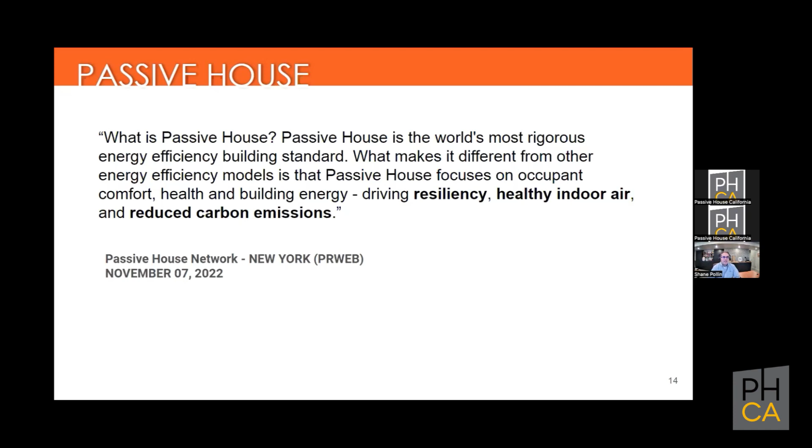We generally regard it as the world's most rigorous energy efficiency building standard. And what makes it different from other energy efficiency models is that Passive House focuses on occupant comfort, health, and building energy, driving resiliency, healthy indoor air, and reduced carbon emissions. Okay, so we generally know what it is. And for those of you who first became interested in Passive House on this call, I suspect you went online and did some research to understand what is Passive House.

And if you do that survey of readily available information on Passive House, what would we find? You'll see some themes. So we're going to do a quick survey. The three most important things about Passive Houses are comfort, comfort, and comfort, right? I'm just going to pull some excerpts out of these articles - various times, some very new, some only within a few years, but you'll see some themes emerge: no drafts off the glass, no cold spots, fresh air, right? Less overheating, sips energy, low income apartments that set a high standard for energy efficiency, right?

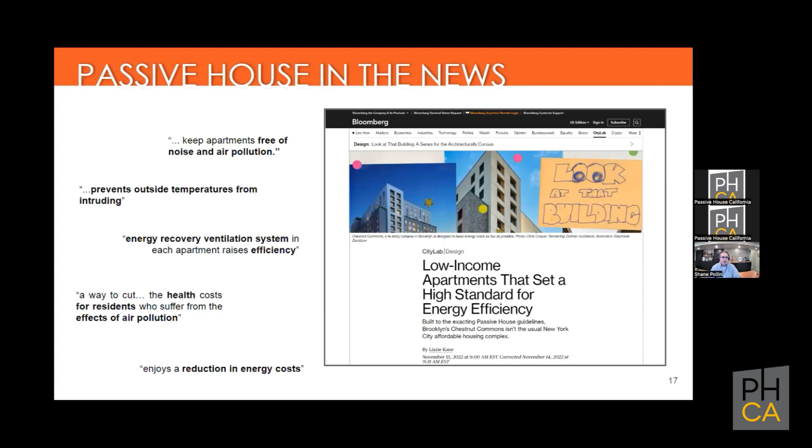Free from noise and air pollution. So not just efficiency, but here we're talking about noise and air pollution, prevents outside temperatures from intruding, energy recovery ventilation system, efficiency, health, a way to cut the health costs for residents who suffer, reduction in energy costs, right? It's a sanctuary, the magic of quiet, low-cost, allergy-free passive housing. Minimal energy, airtight insulation, keep in the heat, clean, fresh, and filtered air, no more smells. Again, clean air, lower electric bills. Comfort would be for everyone. Super insulated apartments, you may never pay a heating bill, tightly sealed, improved air quality, lower utility bills, better air quality, exceptional heat retention. I think we're seeing some themes.

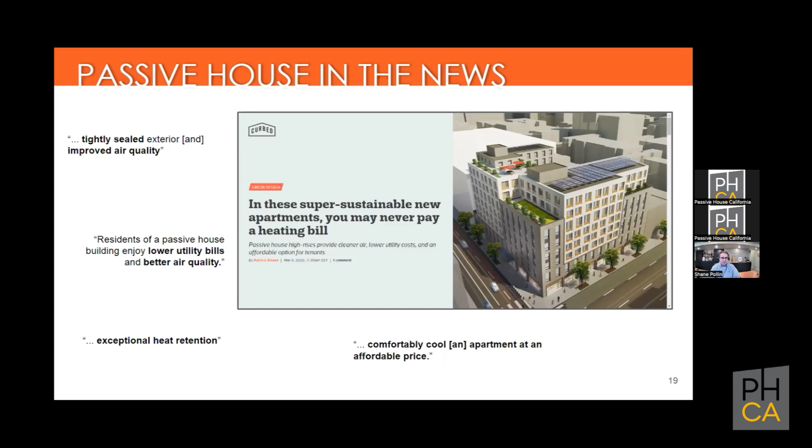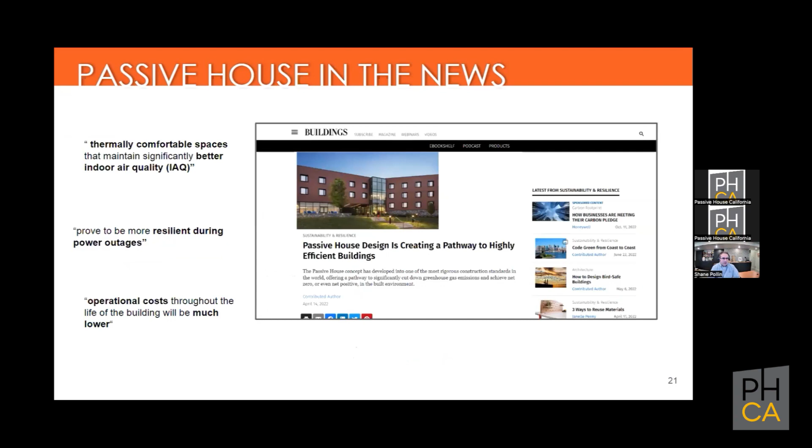Comfortably cool an apartment at an affordable price. How do passive house buildings stay comfortable in summer? Comfortable all year round, much more resilient, right? During periods of hot weather, reduce the heat transfer from outside to inside, helping the building to maintain cooler indoor temperatures. Passive house design is creating a pathway to highly efficient buildings, again, more efficiency. So again, comfort, indoor air quality, resiliency, operating costs, right? Net zero passive houses are the answer to housing energy efficiency, longer lifespan, starting to touch on some other themes, exceptionally quiet spaces. Again, noise mentioned multiple times. Safety and security, even when the power is out, bright, draft-free, consistently warm spaces.

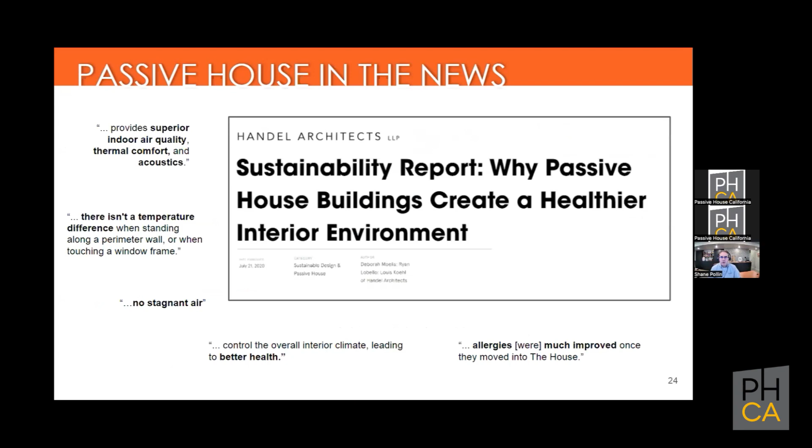Designing for a post-COVID world. So we're getting into some health themes, mitigating the spread of disease, fresh filtered air, again, efficiency, fresh air. Passive house certification should be seen as a powerful tool in your toolbox for providing a healthier, more comfortable, and safer building in our post-COVID world. You get the theme here: superior indoor air quality. There isn't a temperature difference, no stagnant air. This is not all talking about one building - these are various buildings all built to this standard that are all showing some of these same descriptions.

So it's clear that homes built to the passive house standard evidence certain characteristics. Here they are: they're quieter, no drafts, fewer pests, fewer odors, no cold spots, lower utility bills, use less energy, controlled humidity, less indoor pollution, lower maintenance, more fresh filtered air, lower operating costs, more stable indoor temperatures, more persistent temperatures during power outages. So we have, I think it's a list of 14 characteristics here that are characteristics of homes built to the passive house standard. And I'd say that these characteristics embody certain desirable qualities.

We hear a lot about these qualities lately, and here we've heard some descriptions of buildings, but these qualities to me are comfort, right? Healthy, durable, resilient, efficient. Let's go through them.

Comfortable: a lack of nuisance, pain, or unpleasantness in a space, a building that makes occupants feel content and secure.

What were some of the passive house building characteristics? Here are the characteristics I believe meet the definition of comfort, or help a building achieve comfort, namely quieter, no drafts, fewer pests. These are all elements we've heard repeatedly about a variety of buildings built to this standard.

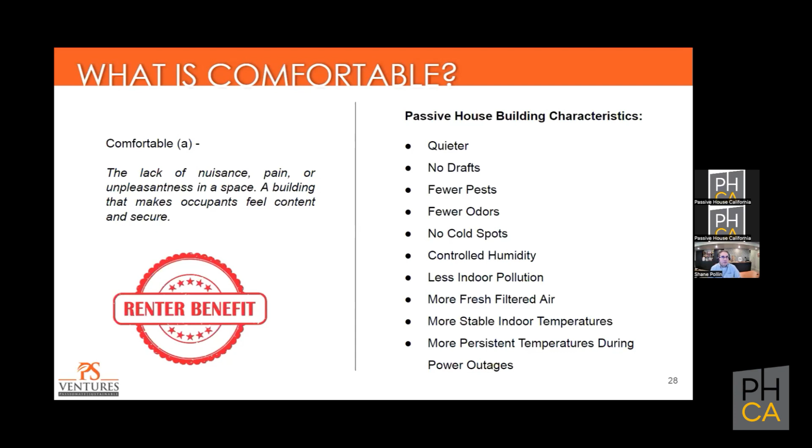I think we need to start focusing on some of these elements, because some of these comfort elements, if you've got high humidity, you can have things like mold growing, unwanted smells, uncomfortable temperatures, pests, outdoor pollutants coming in, and noise. How many times did those articles reference noise?

There's a new one, and you guys in California might be more familiar with this, but some things are new. For example, here in Maryland, there's adoption of legalization to some degree of marijuana. But that doesn't mean you want to smell it all the time in your apartment.

Scent is the sense most associated with memory. Many of you on the phone, myself included probably, have some memory, if you lived in multifamily housing, of what your neighbor was cooking or what they burned or what happened. I think we need to start focusing on and valuing these qualities in our buildings. Passive houses largely focus on sealing between the inside and the outside, but we can also focus on compartmentalization between homes.

Healthy: a building that provides for and enhances its occupants' physical, mental, or emotional state, conducive to or associated with good health or reduced risk of disease.

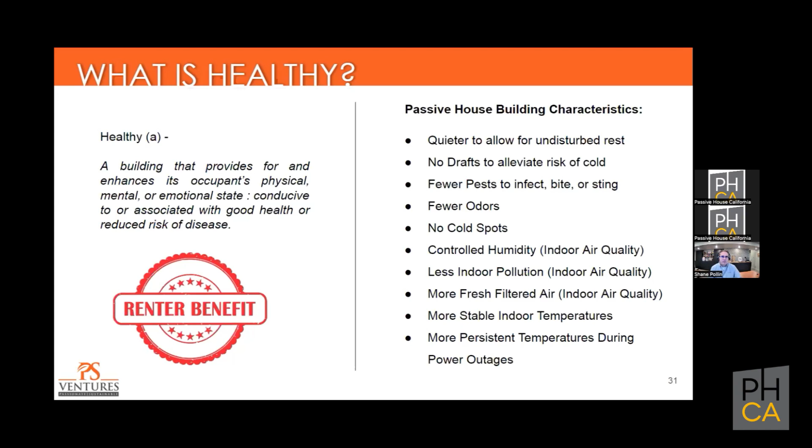Here are some of those passive house building characteristics. You'll note many of them are the same as we heard previously for comfort. In the interest of time, I won't read through them, but again, focusing on indoor air quality, the EPA says that the levels of pollutants in indoor air are sometimes 2 to 5 times higher than in outdoor air. So we're seeing an importance from an indoor health and air quality perspective of filtering out contaminants, having constant, low, filtered air. That's another element of passive house.

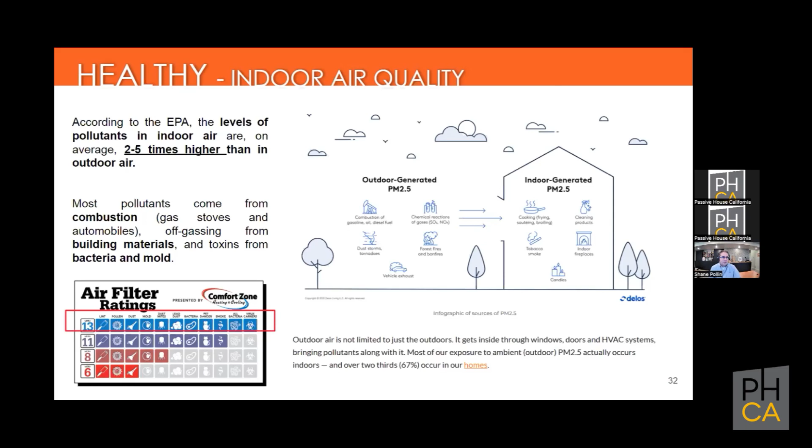I added this to the presentation because I'm respectful of the climate our friends in California are in, and I've spoken to friends who have experienced some of the smoke associated with the fires largely on the West Coast. You can see folks starting to put it together: Passive House is even good at keeping outdoor smoke out, through that same constant filtration. Create a clean room to protect indoor air quality during a wildfire. Wouldn't it be great if the clean room was your whole house, not just a room?

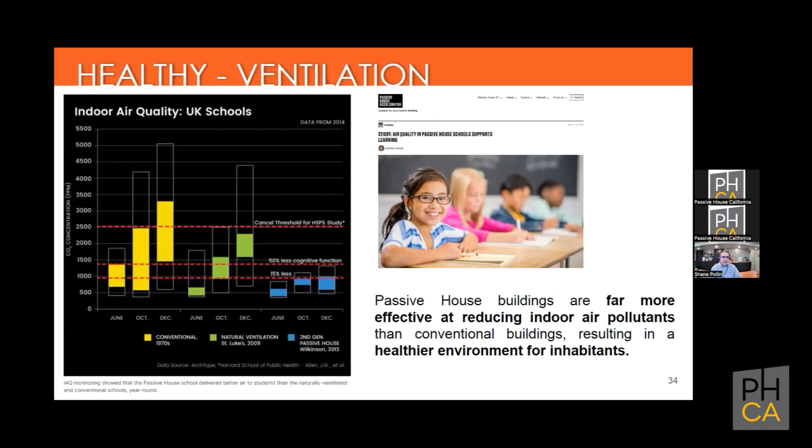Here we see some studies. Again, this information is readily available on the effects of indoor pollutants on occupants. This is from a study of schools, and the takeaway is that the air in a passive house building has far fewer contaminants than other construction types, probably because of that constant filtered air.

Durability is the ability of a building to maintain, over its lifetime, the performance for which it was designed. We'd argue that a lot of passive house is about attention to details, and that attention to detail is largely what helps keep passive house buildings more durable over the long term, especially controlling humidity to reduce risk of condensation. Lower maintenance costs also preserve continued performance with minimal investment. If it's really expensive to maintain, that could affect durability if owners can't afford to maintain it.

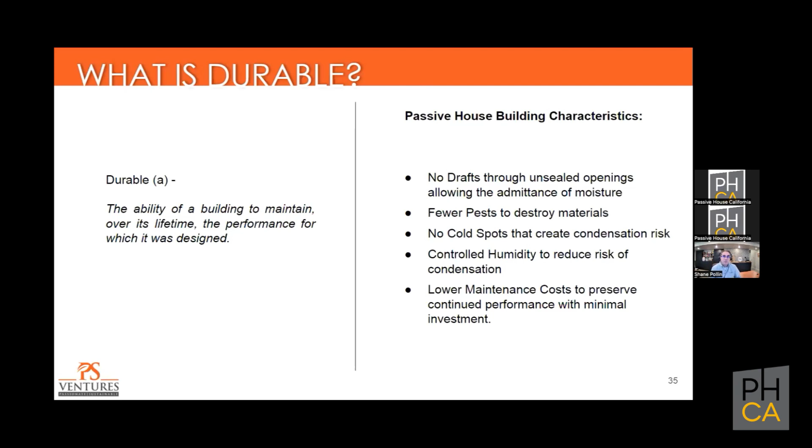Resiliency, right? This one's coming up a lot, and you'll see I've tried to focus on how almost all of these have a renter benefit. It's the ability of a building to resist and bounce back from adverse scenarios such as power outages, extreme temperatures, and damaging weather. In Maryland, fortunately, we don't have the same incidence of power outages that I understand are being experienced in California, so I know resiliency is a particular focus there right now.

I want to focus on this idea that there's resisting and there's bouncing back - there are actually two concepts buried in there. Maintaining stable indoor air temperature and resistance to outdoor temperatures is one concept, and then more persistent indoor temperatures during power outages to maintain livability and reduce time to return to normal is another. If you didn't lose all your heat or gain heat very quickly, you'll more quickly be able to return to normal.

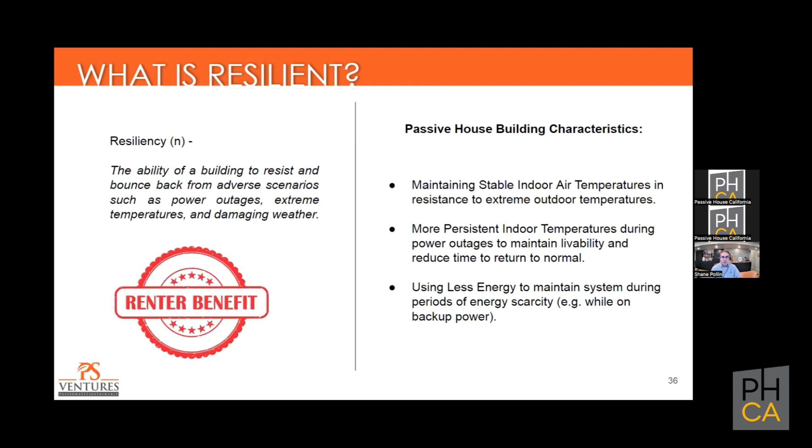Using less energy to maintain systems during periods of energy scarcity. If we have a limited amount of energy available, wouldn't it be nice if we could go farther with the energy that we have?

Whatever the cause, and I think there's a consensus on what is causing some of the extreme weather, weather has become unpredictable and extreme. These are two screenshots of unseasonably cold weather in Texas in 2021. A lot of folks became uncomfortable, homes became uninhabitable, folks were injured, and several people died in both of these instances.

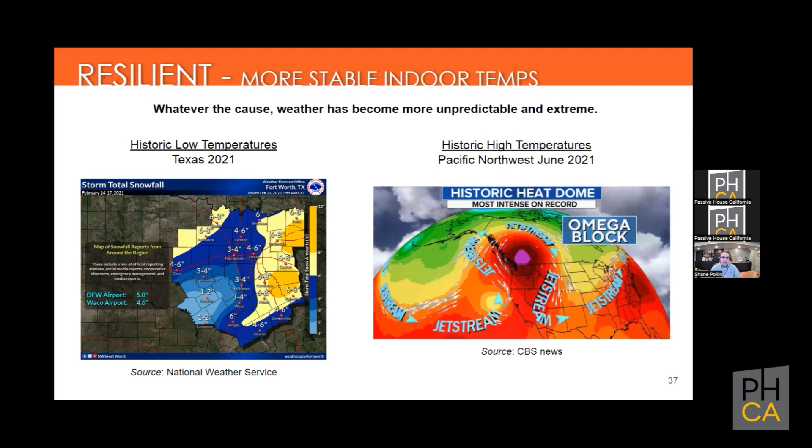Then historic high temperatures in the Pacific Northwest in June of 2021. You can see just a bloom of heat. Again, a lot of the properties in the Pacific Northwest don't have cooling, they're not used to these temperatures. Those homes became incredibly uncomfortable, unsafe, and again, in those heat waves, some people died.

So what do we know about passive house? A study conducted in 2020 compared the simulated thermal performance of various buildings during a winter blackout in Duluth, Minnesota. The bottom line is that homes with passive house standard building envelopes and net zero energy buildings maintained safer indoor temperatures for significantly longer than even code compliant new buildings, lasting over 6 days before indoor temperatures fell below 40 degrees.

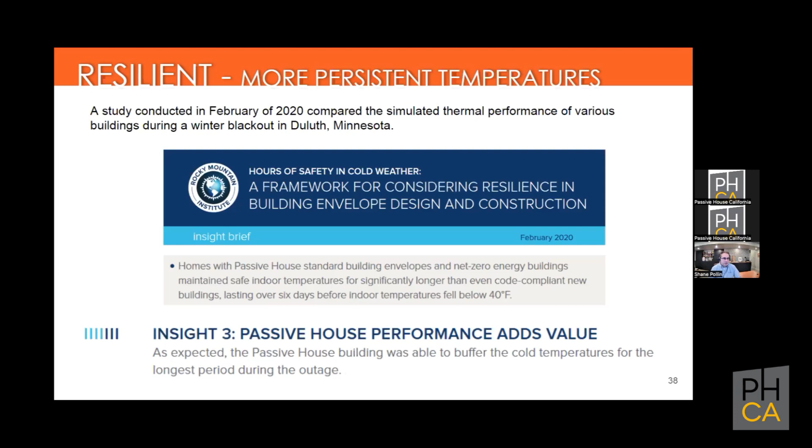As expected, passive house buildings were able to buffer the cold temperatures for the longest during the outage. Getting into that a little bit, what they found is a 90% reduction of severe hours. They categorized the hours based on comfort levels, here less than 40 degrees, and you can see in this slide how much longer it took the passive house building to get cold. In other words, it retained its ability to be comfortable for a lot longer.

So here the passive house building took 152 hours to fall below 40 degrees, as opposed to even just a net zero home at 61 hours. Again, you can put solar on a net zero home, but that doesn't mean it's necessarily going to achieve the benefits we're describing of a passive house. That's an important thing to understand.

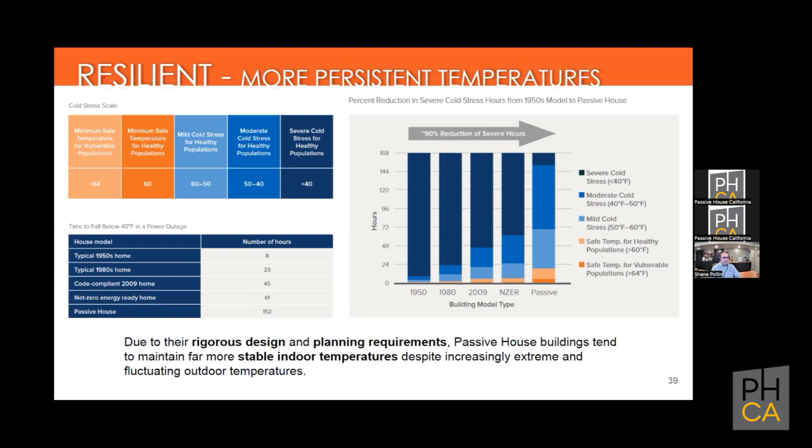And here we see it in graph form, as the passive house persists in its temperature and resists that reduction, that change in temperature, because of its robust envelope.

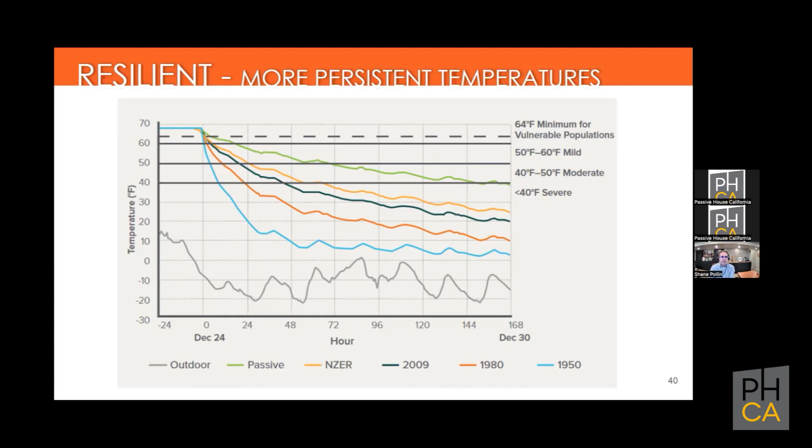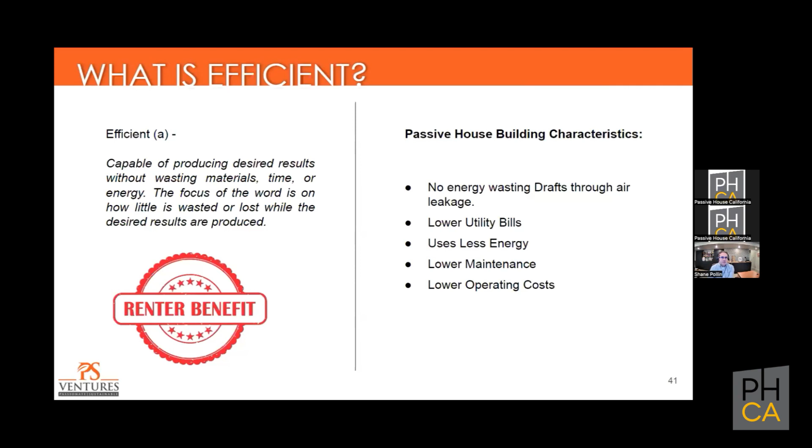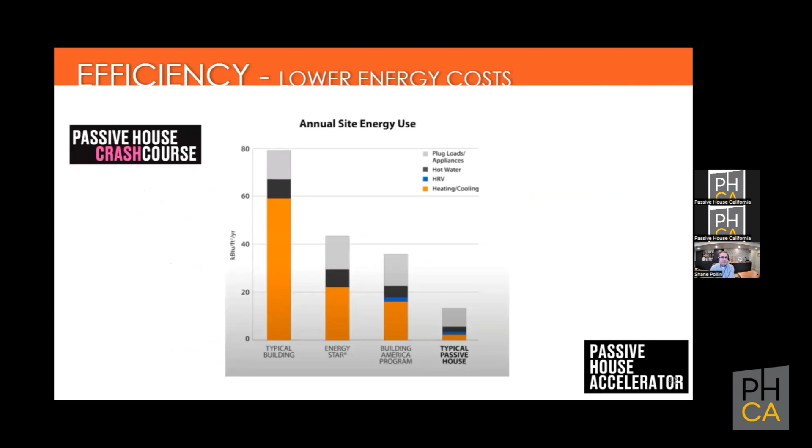Efficiency: capable of producing the desired results without wasting materials, time, or energy. The focus of the word is on how little is wasted or lost while the desired results are produced. Again, certain passive house building characteristics evidence efficiency. I think everybody knows what we're really after in terms of efficiency is a pretty significant reduction in consumption by a passive house building.

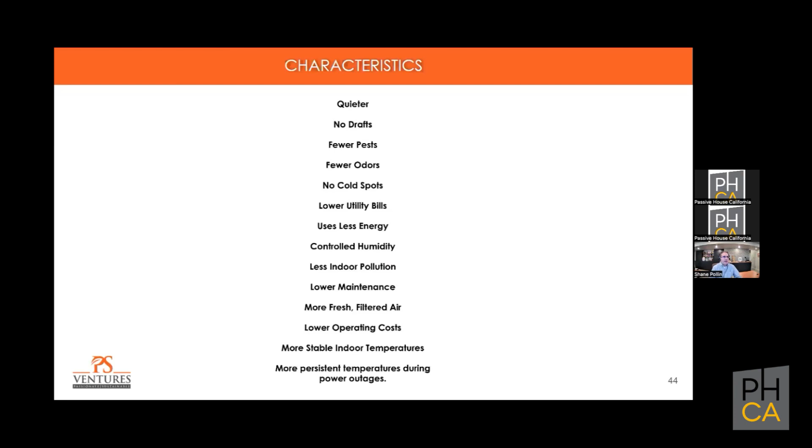So passive house characteristics and synergies. Here are those 14 characteristics we discussed earlier. Here are the ones that contribute to making the building comfortable, and here those that contribute to making the building durable, resilient, healthy, and efficient. We had such a hard time with this, and shout out to PSV team member Will Combs, who's on this call, who helped us visualize this overlap. It's not easy to simply categorize some of the elements of passive house because they're interrelated, and I think this helps show it all together.

So here are the characteristics. These 14 characteristics lead to these 5 great, highly desirable qualities. So if all we need to do is achieve these 14 things to achieve all those great qualities, how do you achieve these things? How do you get these? And that is passive house.

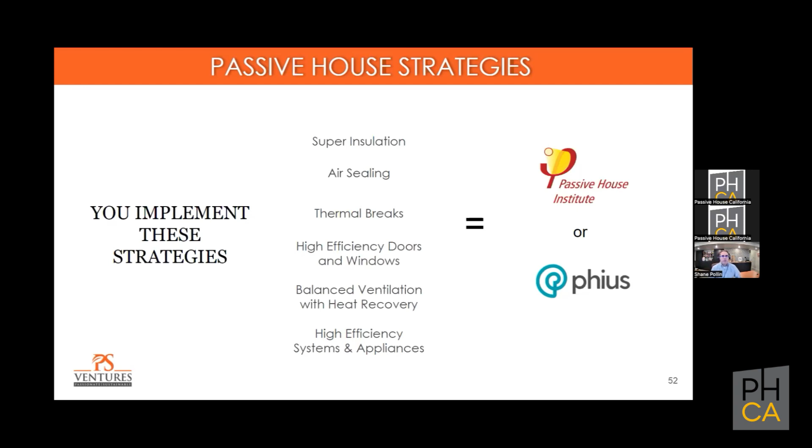The principles of passive house: super insulation, air sealing, thermal breaks, high efficiency doors and windows, balanced ventilation with heat recovery, high efficiency systems and appliances. Unfortunately, we still have this messy two passive house systems, but either is based on the same science and both are focused on these elements.

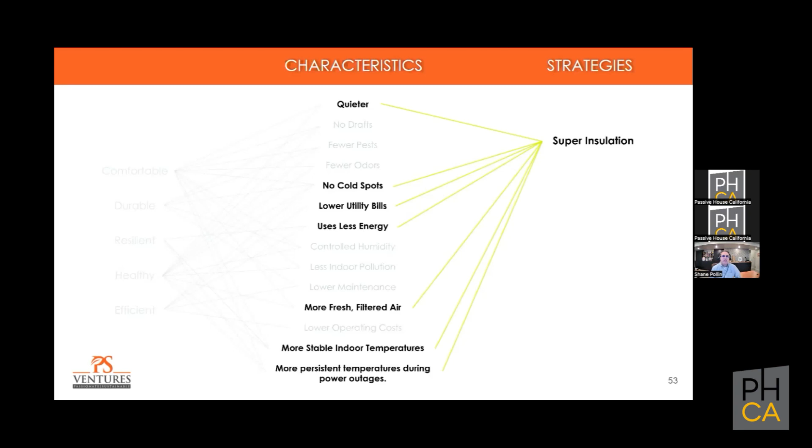So let's go through those. We said superior or super insulation, right? That's what makes it quieter, reduces the cold spots, lowers the utility bills. Here you can see how the passive house elements flow back to create the characteristics. Air sealing is the most important, in my opinion, and as is reflected here, it impacts every one of the characteristics in one way or another.

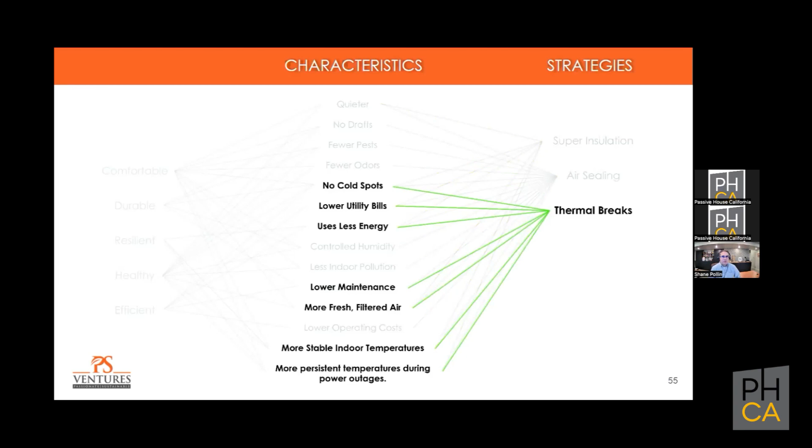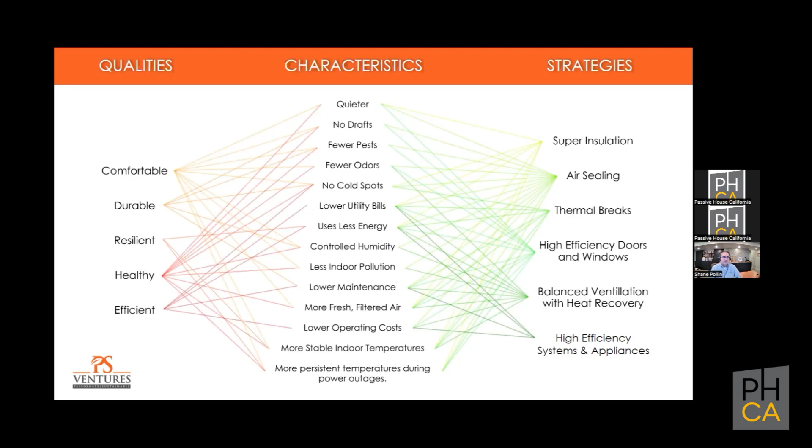Thermal breaks, or reducing or eliminating thermal bridges, high efficiency doors and windows, and balanced ventilation with heat recovery. Here we have high efficiency systems and appliances to lower the utility bills, lower maintenance, lower operating costs. And here we put it all together to see how these characteristics, created by these passive house strategies, lead ultimately to these highly desirable qualities.

So if passive house is so great, with all these fantastic characteristics leading to great qualities, why don't we see more passive houses around here? I think the answer is you will.

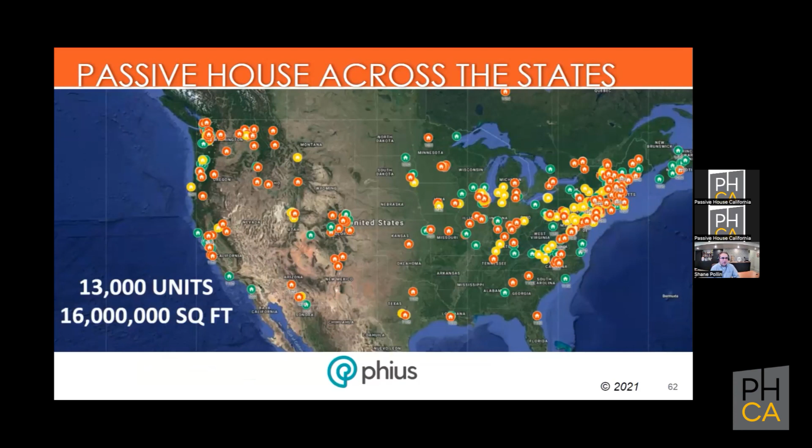I think this is a good place to mention that some of the reason you can see high growth like this is that passive house means not just houses, as everybody on this call probably knows, but you can bring the standard and these methodologies across a variety of product types. I've experienced many of them. So again, more evidence it's not just houses, and largely I think where passive house can do a lot of good is in the multifamily sector. We just finished discussing why it's really beneficial to renters and ultimately will be beneficial to owners.

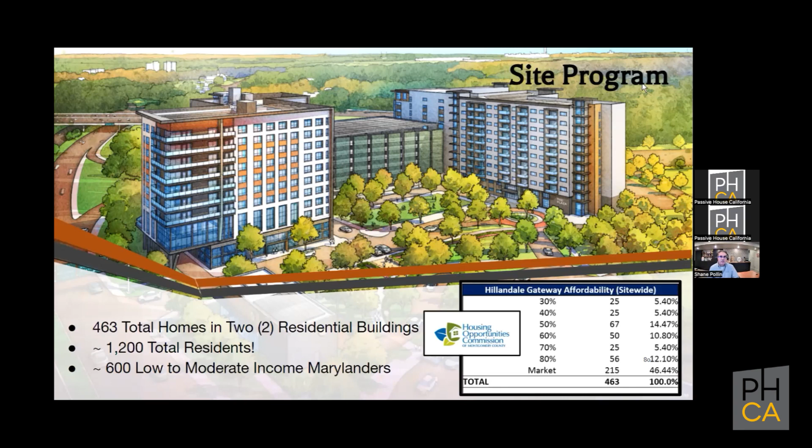However, we don't have just one rooftop. We have the rooftop of that building, we have 2 vertical faces of a parking deck, the roof of a parking deck, and a neighboring roof. And we're going to have the entire community solar devoted to that one building, which is a senior, age-restricted building. In that way, the entire property is really supporting the energy needs of that one building.

At Hillandale, we're thinking about sustainability in a multi-tiered manner. We have foundational at the bottom. These are built in, not something we're bolting onto the building. Most of the passive house elements, the super insulation, the air seal, these are not things that are going to change later. They're baked into the fabric of the building.

Then above that, we have an active backup layer, provided by our backup generators. It's to afford the ability for the office, the leasing staff, to continue to operate in the event of a power outage. We've got some emergency circuits. We're actually going to be seeking an innovative strategy where, while we don't have enough energy to power all units off of our backup generators, we do plan to install a single USB outlet in each unit so that if the power goes out, what do most folks want to do? Maintain connected and charge their phones. We do that also to limit the amount of energy drawn off of that system, by putting it only on a USB charger, but allowing critical systems like telephones, pads, medical devices, small devices that can charge via USB to maintain charge.

And then at the highest level, we will be incorporating a resiliency hub, a dedicated space. This is something being incentivized by our local utility company. We will have the ability to have refrigeration and freezing, for things like mother's milk and medications. While resiliency hubs aren't often required in our jurisdiction to provide controlled temperatures, because we're building to passive house standard, controlling the temperature is relatively easy and is not a high load. So we will be providing controlled temperature. We'll probably provide emergency food, water and light. And we are investigating making that resiliency hub a microgrid.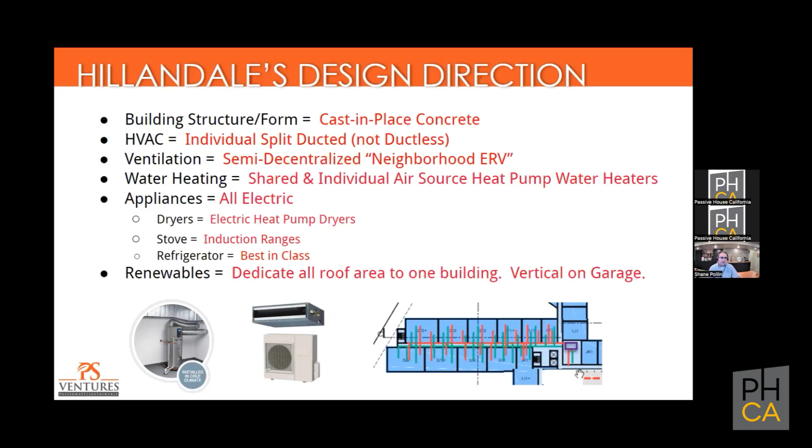Again, all electric heat pump dryers, induction ranges, best-in-class refrigerators, and again, to dedicate all that roof area to one building and vertical on the garage.

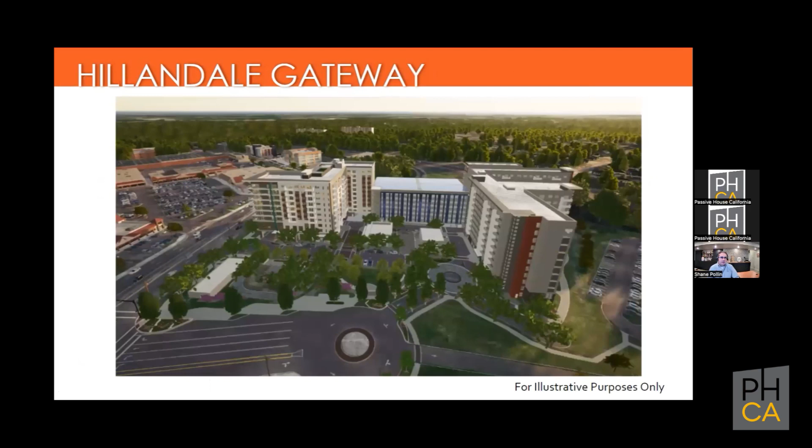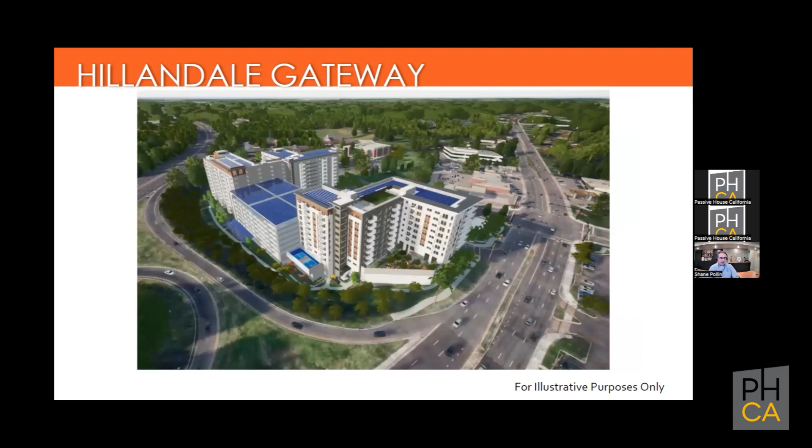And so here we're going to see some other views of Hillandale as we sort of orbit around. That highway in the background is Interstate 495, also known as the Capitol Beltway around Washington, D.C. To the left in this image, you see the Hillendale Shopping Center, and this was again an asset owned, continued to be owned, by members of the Duffie family—so again, very invested in the community. Here we orbit around, and you see the solar on the roof.

Our partner is the Housing Opportunities Commission, and commendably, we do not design the affordable homes any differently than market rate homes. The affordable units are spread throughout each of the buildings, with a higher concentration only within the 155 homes because it represents a replacement of a property that was here previously. But we don't concentrate affordable housing into one area, and we don't change the specification level between market rate and affordable.

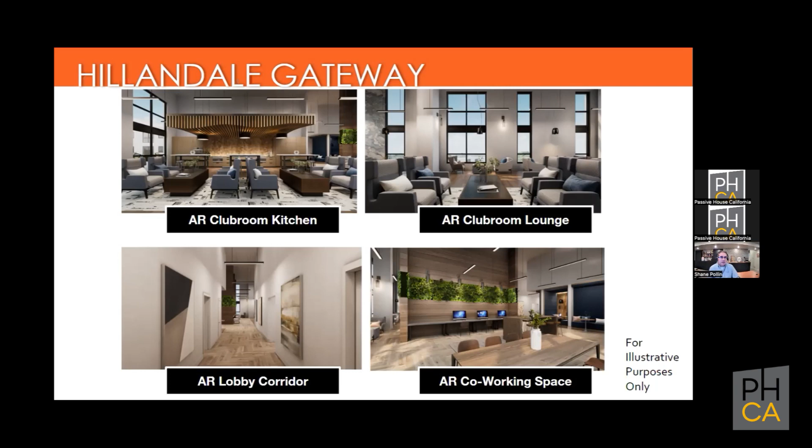So here we see some renderings, and I'll end on this slide. The most common question I usually get, particularly in the development community, is how much more does all of this cost? I like to say that's really the wrong question. The right question is: is it worth it? If something costs $100,000 more, but you save $100,000 a year, does it matter that it costs more?

Also, on how much it costs, I heard this analogy used again earlier today, for those who might have been on the Passive House Accelerator call. It's like asking how much is a bag of groceries? Well, it depends on what was in the bag. I'd argue there are a lot of things in these passive house buildings that are difficult to quantify. We went through a lot of them earlier: comfort, resiliency. We have to start valuing these things, but it's hard to put an exact number on them.